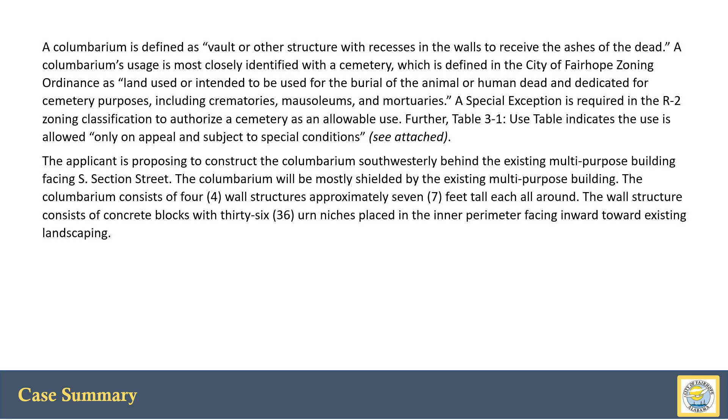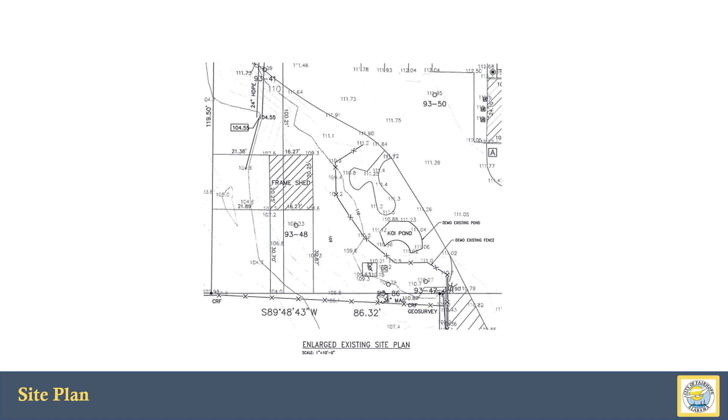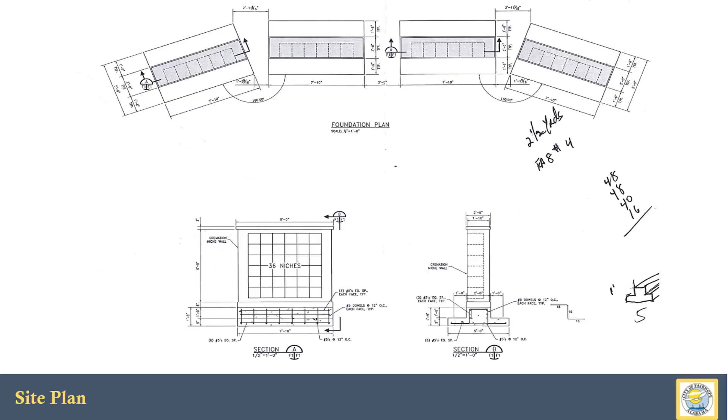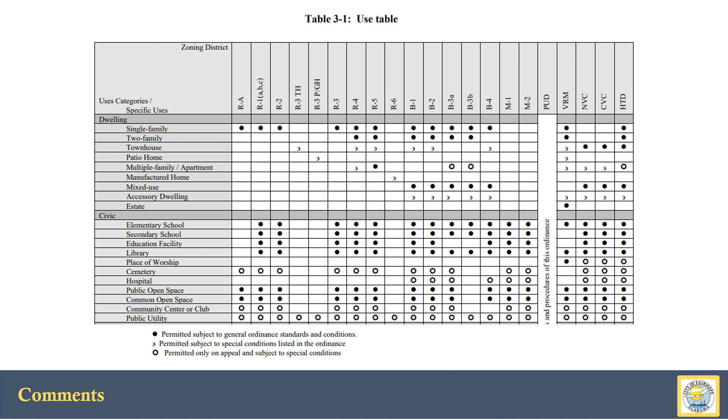There it is from the side and what it'll look like all together. And there's your use table. You can see cemeteries down there underneath Civic, and it's got the hollow dots, meaning it's permitted only on appeal and subject to special conditions. So that's what we're doing.

And we recommend this. Some of them are here to talk about it if you would like. Any questions?

Is the applicant here to make a presentation for us? Yes. If you'll state your name for the recording, please, and come up to the front. Steve Cumby, Lanier Construction.

Did you need to add anything? No sir, it's a very nice setup. It's stone and marble and concrete, and it's going to be in the rear of the church, as you see the area on the back side. It's not an imposing or big structure—it's only 7 feet tall, and there's going to be 4 of them, in a little semicircle in the back.

Does it impact drainage in any way? No sir. This area is probably 15 to 17 feet deep and about 30 feet wide.

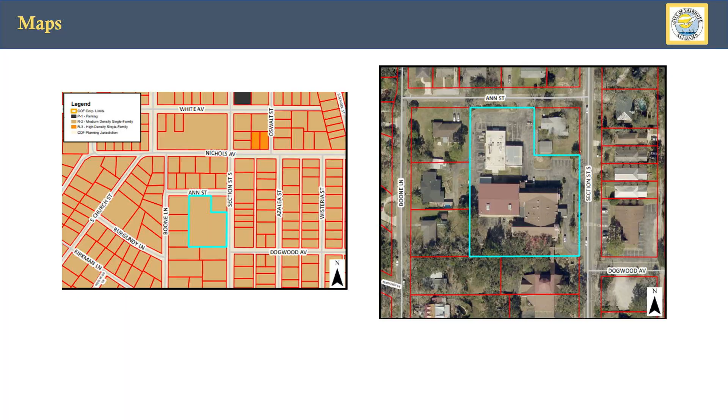Once the landscaping is done, installed behind it, you actually will only be able to see it from our parking lot. You won't be able to see it from Section, certainly won't see it from Boone, and you won't see it unless you come into our parking lot.

So there were only 3 people that wrote to us from the neighbors, is that correct? Yes, I believe so. And I only saw the 2, and I answered 2 of them. Okay, they seem to be content.

Yeah, there's enough vegetation around the backside where it's going to go now. This is going to have good drainage, no water, so we won't create any more runoff. Approximately about 4 by 20, we're going to create about 80 square feet of concrete total, and that's a minimal amount that we'll have to run off. But we're going to have lots of grass around the concrete to absorb the water, so we won't create any more runoff than what's existing there now. And it's got good drainage there.

There's lots of organics around the backside of the church. The water is absorbing into it with that minimal amount. So I don't see any reason it should cause any problems whatsoever.

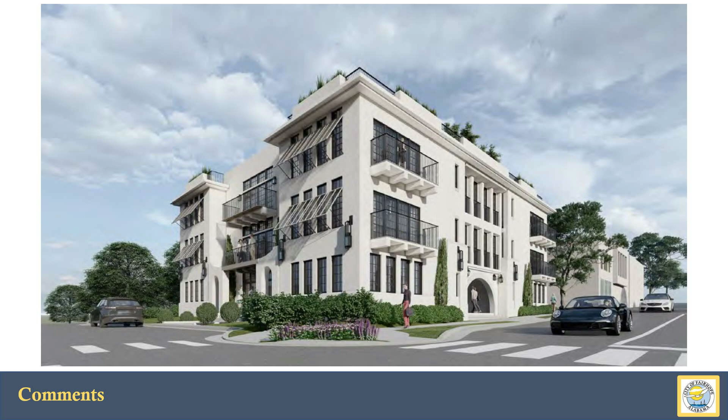It is zoned B2 and lies within our central business district. Starting with the graphic there of what we're showing, hotel use in our zoning ordinance within B2 and the CBD is not allowed by right. It, just like the columbarium, requires approval through the Board of Adjustment and is subject to special conditions, so that is why we're in front of you here today.

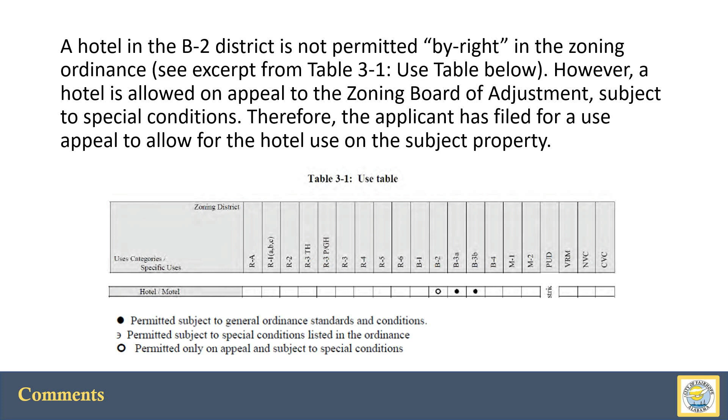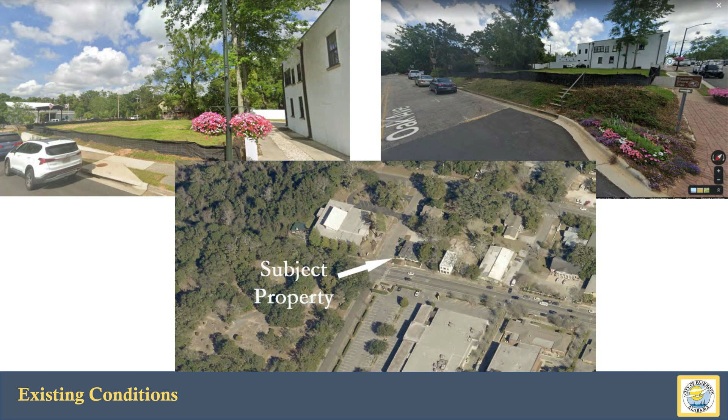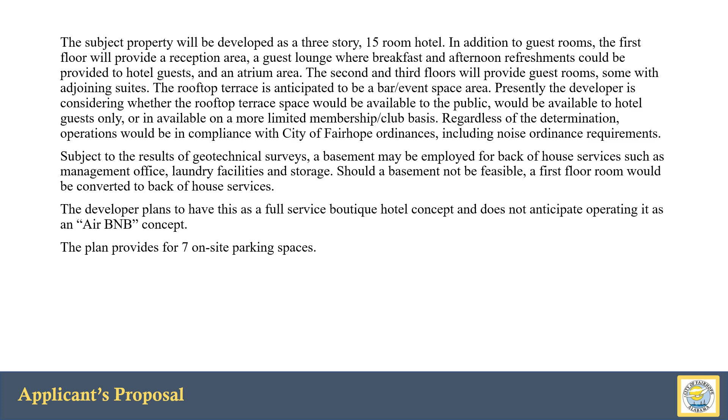I'm not going to get into a lot of this, it's the applicant's narrative on how they're operating, but in general it will be a hotel, owned and operated, boutique hotel with event space. It is not an Airbnb concept, it's a full service hotel, and the applicant is here to speak to that specifically, so I'm going to let him describe more about the operations if you have questions.

As you all know, we do not have parking requirements for commercial property. It does not have to provide parking in the CBD. The only requirement in the CBD is one parking space per residential unit, regardless if that's a 10-bedroom unit or a 1-bedroom unit.

Now, we do look at any hotels within the CBD, anything that requires special exceptions, and evaluate those. I think you can see within the staff report we look at the site and what's around there, what kind of parking is around. I think Fairhope has been very forward-thinking, even though it draws the ire of some, from a planning perspective, where we're not designing for cars. Our central business district is intended to be pedestrian-friendly, and we're not providing parking spaces everywhere.

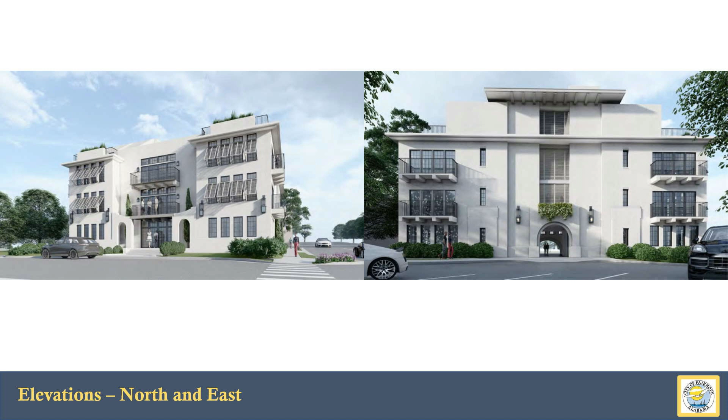At the same time, we have to be conscientious that we also don't want to kill the vitality of downtown by not having any parking. So we looked at this and what is around this site with the Civic Center, and think there's a good balance. While the applicant could have built lot line to lot line, or at least proposed that, they did not, and are handling some of the back of house items, like trash or utilities, which is something we're seeing issues with from a lot of projects when they build lot line to lot line. They are providing 7 parking spaces, and we'll look at some of that.

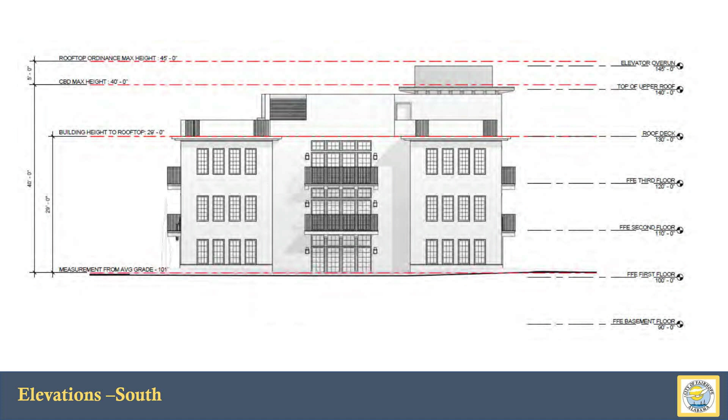On elevations, one of the new allowances within our zoning ordinance is a rooftop terrace. This was a concept that would allow something to be done on top of the 3rd floor. We've seen a few proposed, but we made an amendment there where that does not become a story, and it also cannot be covered 100%, filling up the rooftop. I think it's limited to basically 25% of that rooftop structure.

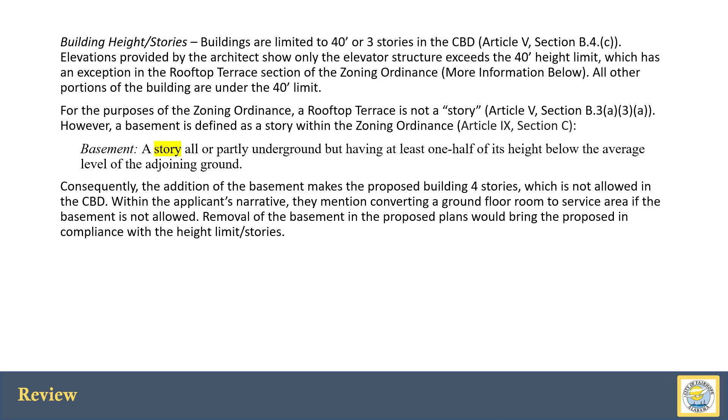So just flipping through some of the floor plans here, we have the 1st and 2nd floor, 3rd floor, and then the rooftop. As you noted in your packets, we don't have it on the screen here, there was a proposed basement. That is not allowed under our regulations.

That is a story. Applicants agreed to that, so I think you'll see that reflected in our condition. And then, of course, the rooftop terrace, where that 25% gets him, everything shaded here is certainly within cover. We do allow for elevator shafts. That amendment for rooftop terraces allowed an extra 5 feet in height just for those elevator shafts and the equipment that goes with that. That is limited to 7.5% of the rooftop terrace, which they're completely within that. Everything else you see falls under the 40 feet height limit.

So, but then what is on top of that 3rd floor is limited to 25%. It's a lot of moving parts, but there's a little question here, something that's not highlighted that shows a covered outdoor lounge would probably not fall within, because what's highlighted is kind of right at the 25% max. The specifics on that, this would also go to our planning commission and ultimately our city council for a site plan review. That's where we're going to get into very fine-tuned building plans and drainage and utility connections and those sort of things. So as you'll see reflected again in our recommendations, there are 2 conditions that will address those.

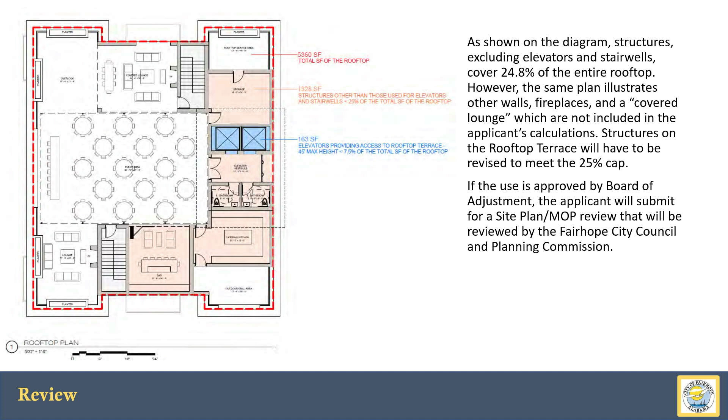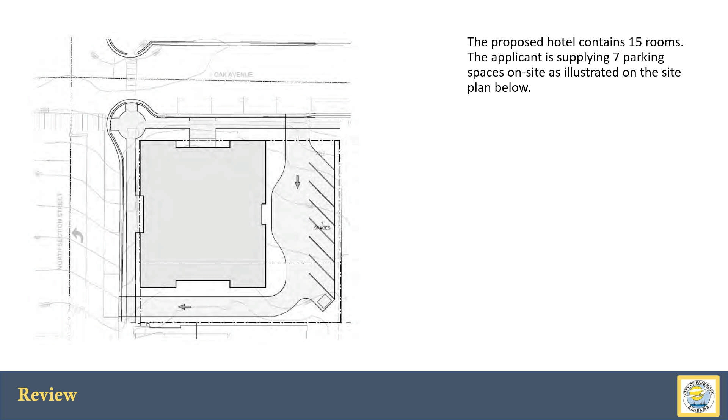Here's the proposed parking lot that sits behind the building. A lot of work being done in our right-of-way with the sidewalks. I'm not going to rehash the writing here. There is a net benefit of 5 additional parking spaces in the area. 2 will have to be removed on street for the ingress and egress.

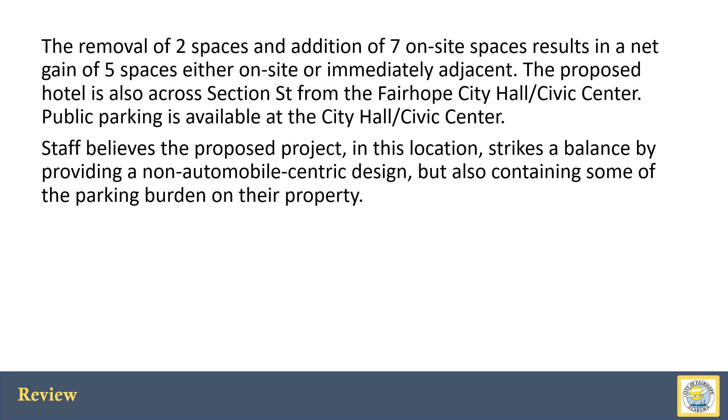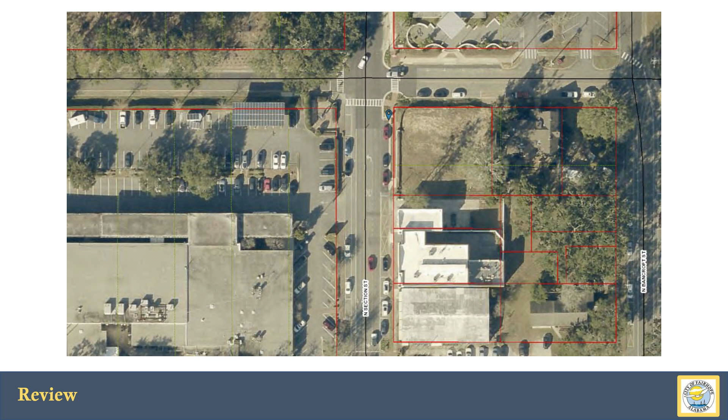And you can kind of see there that everybody knows the parking lot out front, and there are some times a year where that's full. You know, if it's the Mardi Gras or something like that, we might need a shuttle. But I think that'll kind of work itself out from a practical matter. Getting downtown to park, you might not want to be there, because we block that parking lot off a few days ahead of time.

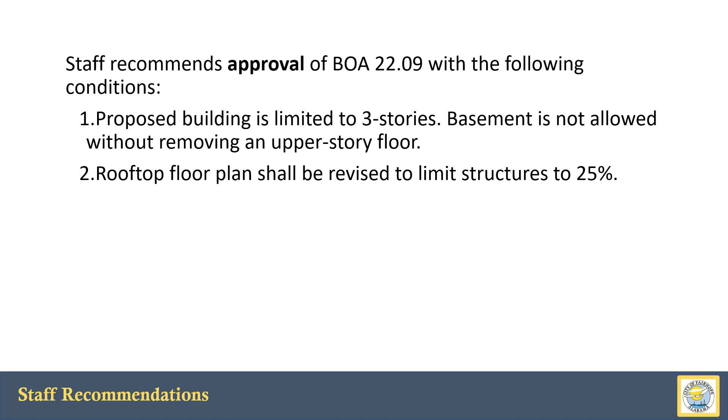So staff does recommend approval of Board of Adjustment case 22.09 with those 2 conditions. The proposed building is limited to 3 stories. Basement is not allowed without removing the upper story. And then the rooftop floor plan shall be revised to limit structures to 25%. Applicant is here. If y'all have any questions, I'm also here to answer those as well.

Why are they limiting rooftop floor plans to only 25%? I'm just curious. So when we looked at this, you basically, in essence, you end up with a 4th floor. And we have a limit of 40 feet and 3 stories. So to allow a rooftop terrace that doesn't... 25% is supposed to be located away from the public right-of-ways. So your street view still has a little bit more of a pedestrian scale, and you're not 4 stories right at the street. So that was the intent. So we allow this, but it kind of gets pushed back.

Now, that's only on a 3-story building. If you do a 1 or 2-story building, there's no cap on a rooftop terrace. So as long as you're not pushing up to the already other limitations, we have made accommodations for those within the rooftop terrace amendment. Was that kind of common in other planning areas about percentages on rooftop terraces?

It's what the goals of the local areas are. New York has rooftop terraces 40 stories in the air. So I think one of the big things, and it's been pushed through the years, especially the last 5 years, the height limit was 35 feet. Then it went to 40 feet. Now we're allowing a little bit more for elevator shafts. But I do think the overwhelming sentiment is keeping it at about 3 stories right now. So with that goal in mind, yes, I think the 25% was, and kind of not being located in the front was important for that amendment.

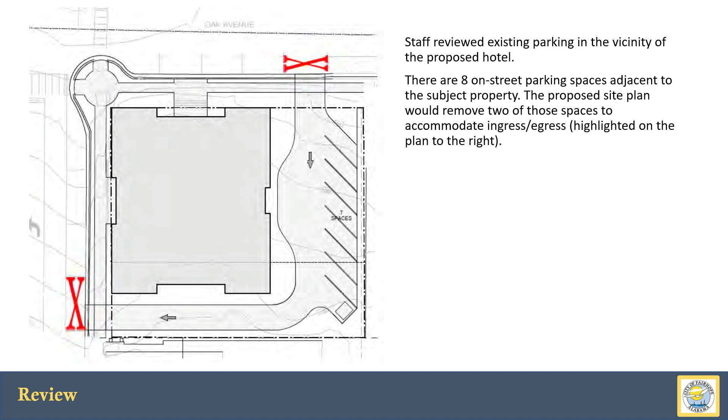At the same time, we are having to revisit some parking requirements in the CBD. That's probably some of the goals proposed in zoning changes. Most of those will affect offices in the CBD, because we want to preserve the commercial aspect, the retail stores, and we don't want to be just filled up with offices. That doesn't attract.

There is no overnight parking on the streets. There's no enforcement, there's no penalties for overnight parking, unless somebody's illegally lingering there for a couple of days and they draw attention. But I don't know of anybody going out every day. We don't have, I don't know if this term is correct anymore, the meter maids - we don't have that. So we don't have anybody monitoring parking, and we don't have any time limits on any of our parking spaces.

2-hour parking or those types of things used by many cities - there's no meters on our parking spaces. But overnight parking is allowed on the city streets? Happens every night. The enforcement of that - it's not enforced, we don't have any. We have some language that you can't park like an RV on a city street, or food trucks or commercial vehicles, but I don't think there's any restrictions on parking overnight.

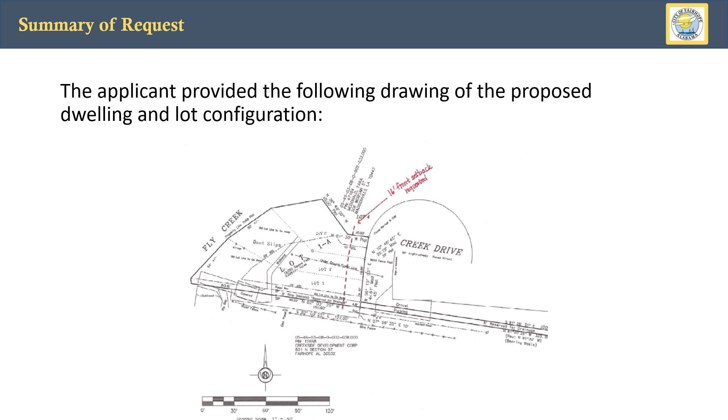We went through a lot of options. Some of the land is not there. What was originally there is actually part of Fly Creek now.

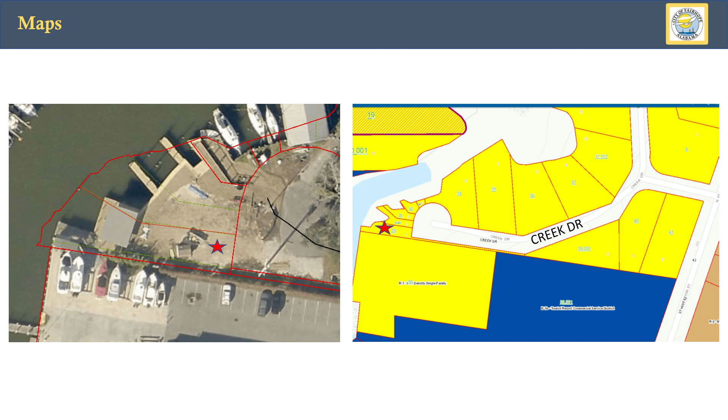So where we landed, and I'm going to go to the last motion. The motion was made and seconded to approve the front yard variance to allow a 24-foot front yard setback subject to 7 different conditions. Lots 1, 2, and 3 shall be replatted as one lot.

The location of the underground utility shall be shown on the recorded plat. Approximately 35 feet underground, there was electrical lines that went under Fly Creek, where they replaced those. The applicants worked with our electric department and got that created.

A 5-foot drainage easement shall be included on the above-mentioned recorded plat along the southern boundary. A recorded 10-foot easement granted to the applicant and lying south of the 5-foot drainage easement shall be recorded. Final language shall be approved by staff prior to filing with the judge of probate.

Number 5 was coordination with the City of Fairhope Utilities Department prior to the issue of building permits. Placement of a note on the subdivision plat stating that a dwelling will be constructed on existing underground utilities. Any future structure must comply with those regulations.

And then finally, the existing structure and utilities located on Lot 3 will be removed prior to issuance of a building permit for new construction. These are the motions as they were adopted by the Board of Adjustment.

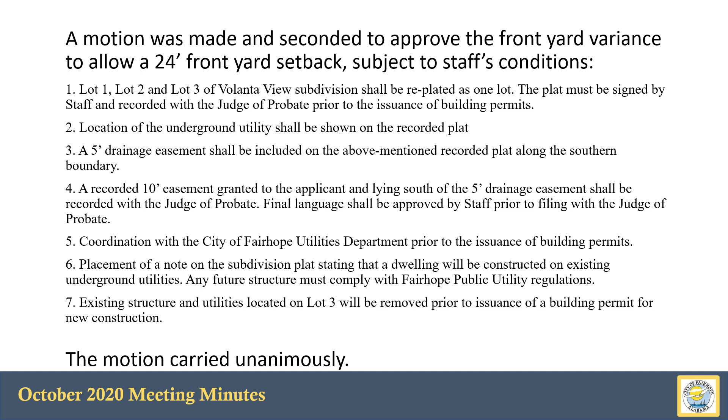Some of those have been clarified already, but we're putting in front of you just the same way it was, as we would be coming in and asking for an extension instead of a new approval. So if y'all have any questions on this one, this was advertised and will require a public hearing. So I'm here if you need anything, and I can move to the second one after we work through this one. Okay, is the applicant here with us?

Okay, you'll come up and state your name for us. Yeah, my name is J.J. McCool.

And mine has been, it was recorded just the next day. You said, but I recorded the next day once I got the variance, and we started working with the engineer, so it was recorded. Okay, so two things without getting a variance. When you get a variance, you've got two things you got to accomplish: you got to record it, and then you got to act upon it within a year.

Okay, so we've looked at, JJ's been working through architectural plans and other stuff, and y'all know what's going on in the world, supply chain issues, COVID, we've had a lot of things happen. So you did record it, you just didn't start construction? We did.

Well, we re-recorded it, and then we attempted to start, and just with COVID, everything kept getting pushed back. And then during that time, we started working with an architect instead, and we changed up our plans. We've got our drawings done, the engineers have them right now. The engineer is still working through the stuff, but we've got all our floor plans done, the concept drawings done.

All we're waiting now is for the engineer to get back with us with a foundation, so I can turn that in for our foundation plan. All that's been done, the geotechnical report's been finished. All of our subs are in place as well. So all I'm waiting on now is just to get the stuff back from the engineer, and we can get going.

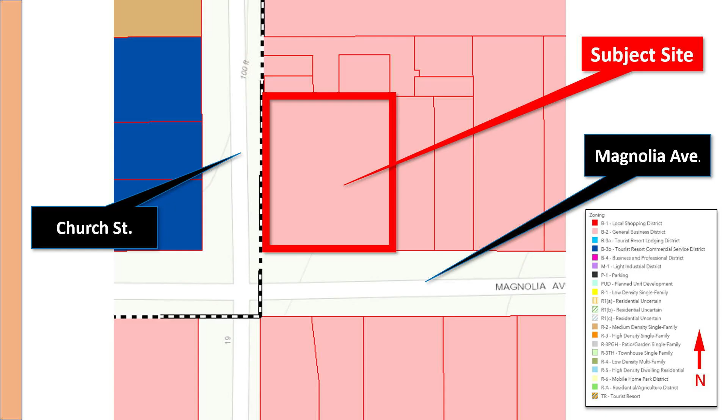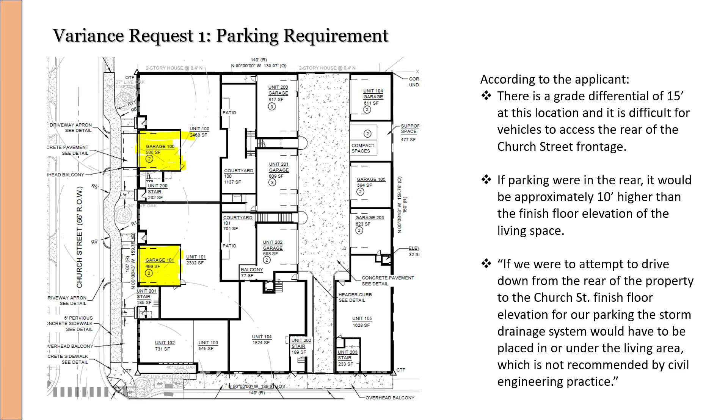In the CBD, parking's supposed to be screened. There were 2 units facing Church Street where the garage door faced Church Street - that was one of the variances. Then there was a sidewalk variance in a small section, which I believe we can show you here. So there were 2 garages with doors facing Church Street, adjacent to the sidewalk, and that variance was granted.

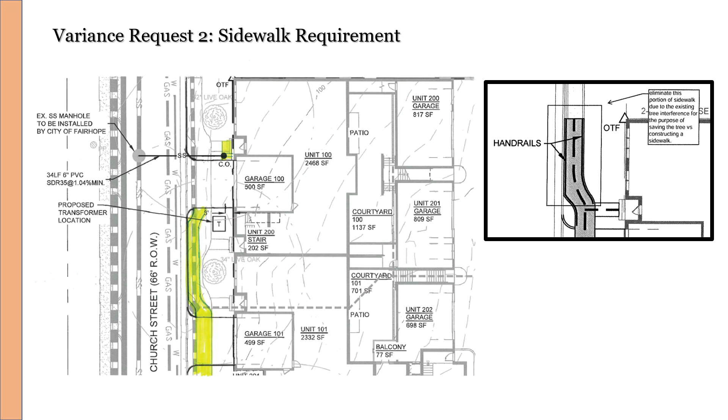And then there was a section here that was going to be very tough to get an ADA sidewalk in - I believe it was a 3-foot area that did not require the sidewalk. Does that sound right? A very, very small portion that did not meet the requirements. So ultimately on the variance, let's see, that was our recommendation.

Now, some of those worked themselves out through the tree ordinance - make sure we're on there. Yep, that's it. So this was the motion that was made and adopted: it did allow the parking requirements within the CBD variance, and the sidewalk width requirements, subject to all sidewalks being ADA compliant. Where we rely on a 6-foot minimum normally, we allowed in that small area a 4-foot minimum in width.

The subject shall be limited to the 2 garages that address Church Street, and installation of sidewalks, driveways, and utilities within the city right-of-way shall require a right-of-way permit. Trimming and removal of trees in the right-of-way shall be approved by the City of Fairhope Public Works Department. There's already been a lot of review on what the trees would be, but when it's ultimately done, that still requires the right-of-way permit, so there's no harm in leaving that condition in there as well.

We do recommend to move this forward as it was presented. And what happened in this situation - why it didn't go within the year? Was it recorded? Vance is here, so I'll let him speak to that. Okay, okay.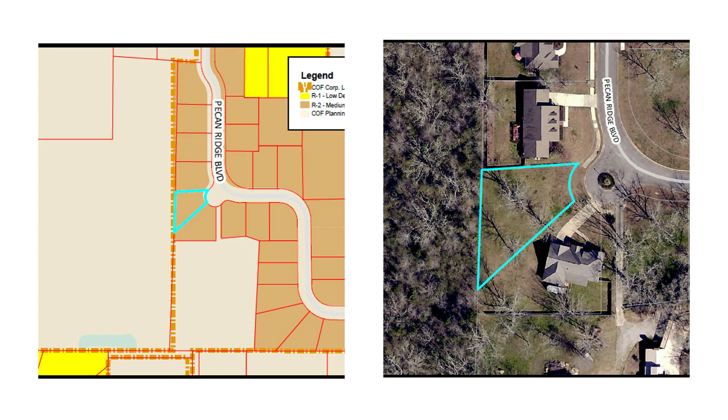We kind of had that discussion - how far do you go when you're giving a variance? What we looked at, the 35 matches what most of the homes were in that area. I kind of just jumped to there's the original plat that requires a 45-foot setback. Cumulatively, what we were looking at in those variances is, let's see, do we put it - oh, nope.

So I've got to think about this because the notes you put were very accurate, but I got to do the math. So it would be a 10-foot variance to the front property, 7 foot to the rear.

So we've got two now that have expired. Can we combine them? Yes, we did that with the first one, but now we rolled one up in 2021. So if we're going to do this, the variance request I would recommend approval for, if we so choose, would be a 10-foot front property setback and a 7-foot rear.

Okay, and if the motion is made that way, we did not have any conditions on this one.

Just a tidbit, the people purchasing the property wanting the variance are no longer involved. The property owner who created these setbacks in this shaped lot would like to keep the variance going, so he's paid the application fee. He was actually the original applicant as well, and we saw some house plans presented before, but those are no longer relevant, just a request to keep the variance to try to market the lot.